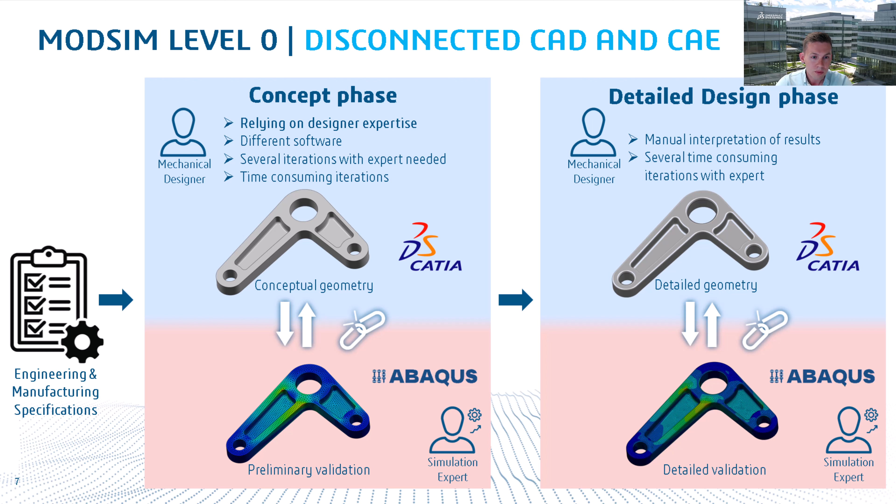The next level is if you use 3D Experience, you have integration between CAD and CAE, which means it's very easy to go from the design to the simulation. The simulation setup is created directly on the CAD geometry. So whenever the designer will do a modification on the CAD geometry, the simulation experts can take the model and just run the simulation. It will be automatically updated to consider the design change. So it is already a big gain in terms of time in the design process.

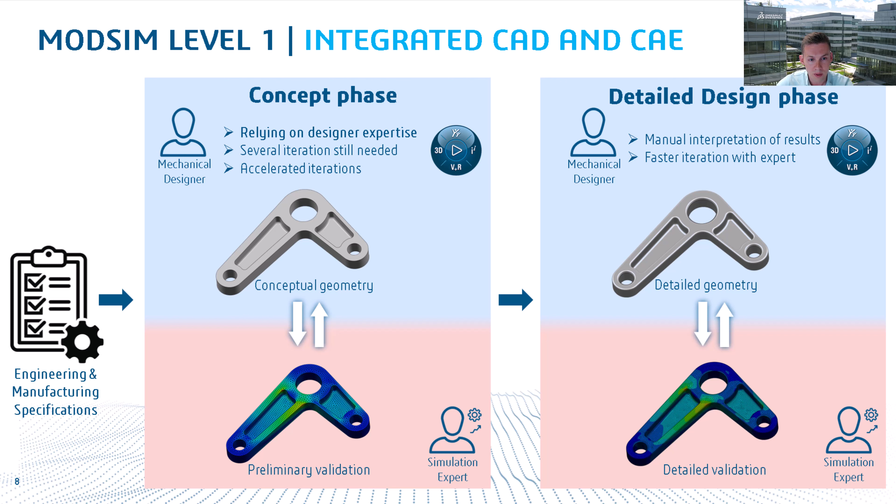However, the most challenging point when you do that is for the mechanical designers to send to the simulation team, and the simulation expert maybe will not be able to answer right now. Maybe they will work on that 1 or 2 days later. So there's a big delay between those two phases. And that's the next phase: trying to push simulation for designers. So we are never asking designers to be simulation experts. That's not their job. But the different companies are asking their designers to start getting some fundamentals on what is a simulation, how does it work, and be able to set up a simplified simulation on their geometry.

So with the help of a simulation expert, they'll be able to do the iteration by themselves. These are big game changers in reducing the time to design a product.

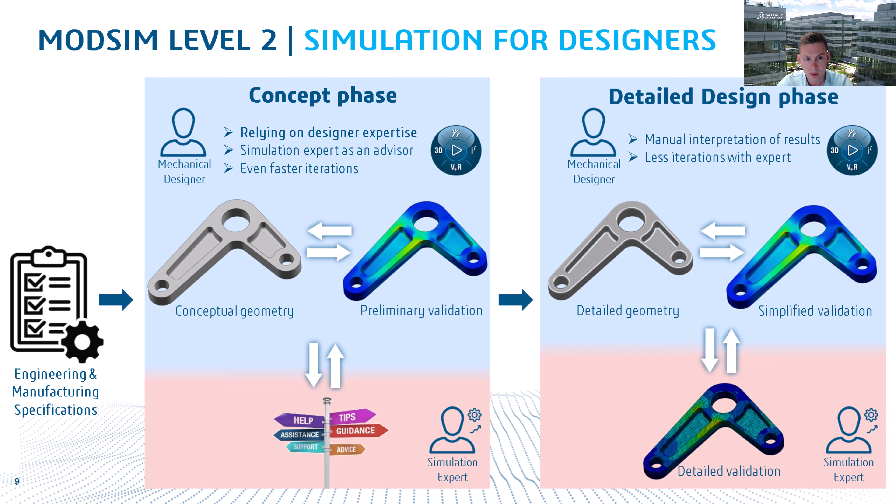But so far we still have one big challenge: interpreting the engineering specification. The designer relies a lot on his own experience, or maybe established company best practices. This interpretation of the specification is the main issue. So we ask, how can we simplify that? How can we help the designer go directly in the right direction? Because if you don't make the right assumption at the start, you'll go in the wrong direction and waste a lot of time. And that's the next step.

This is what we call generative design. We are still doing simulation for designers, but instead of having to guess the right shape, we start from the specification, meaning the designer defines what the product needs to respect. The software will propose an optimal shape based on the specification, and from this optimal shape you can automatically generate a CAD geometry and validate it.

As this process is very fast, in one iteration you can get a product that works, and you can even explore more possibilities. What if I change the manufacturing process? What if I change the material? You can generate multiple alternatives and do a trade study between all of them. So that's for the concept phase.

Even after, in the detailed design phase, rather than sending the geometry to simulation experts, looking at results and doing modifications, you have tools that help refine the geometry. Just by looking at a simulation result, you see, okay, here you have a stress concentration—let's automatically modify the thickness of these branches. So we are really providing guidance to the designer all along the process.

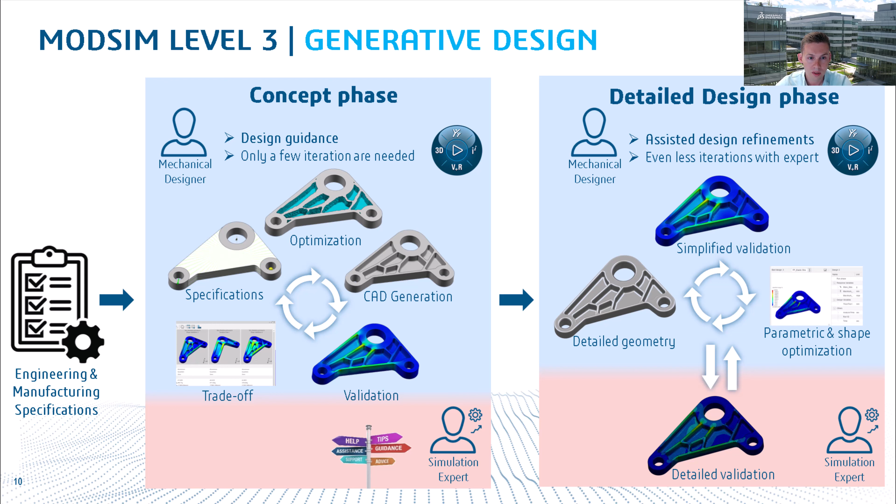Generative design, at first, maybe most of you know it can be used for additive manufacturing. It's true, but our customers are mainly using it for standard processes like plastic injection, stamping, casting, forging, and milling. The main reason is that most parts in industry are manufactured with those processes, not additive manufacturing—that's a nice technology, but a very niche market. So being able to do generative design for traditional components is really key for our customers and for us.

That's why we spend a lot of resources considering those manufacturing process constraints right in the specifications. So what we can generate at the end is really a product, as you'll see in the examples, that respects all the specifications of those processes—maybe generating ribs for plastic injection, generating beads and cutouts for stamping, respecting the parting line, the thicknesses for casting, and so on.

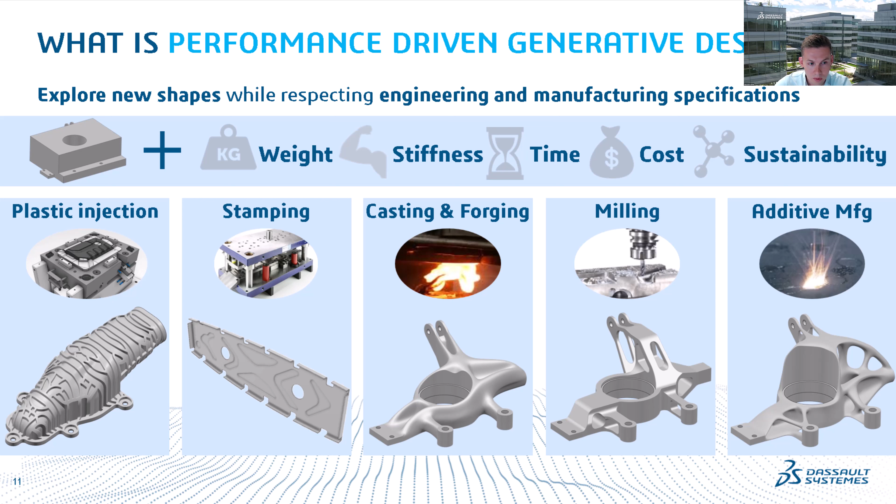If I take this example, it's an air intake duct where we have flow going through the part. Let's say I want to redesign this part because the performance so far isn't good, meaning the performance of the flow going through the part. So what we can do with generative design—since you can do it on multiple physics, structure but also flow—is first optimize the flow, the area for the fluid inside.

Using the flow generative design approach, you can find the best shape that will minimize the pressure drop. This leads to a very important increase of performance of the flow system.

After you have this new shape, at one point you want it to be injected, so you also want to reduce the amount of material to reduce cost. So you use our generative design approach to optimize the structure of the part. As it's an injected component, you want to find the best rib pattern on the shape. Using generative design, you just specify that this part will be plastic injected, and the software shows you the best rib patterns you can have on the part.

And from the geometry, we create the detailed design, and the part is ready for manufacture.

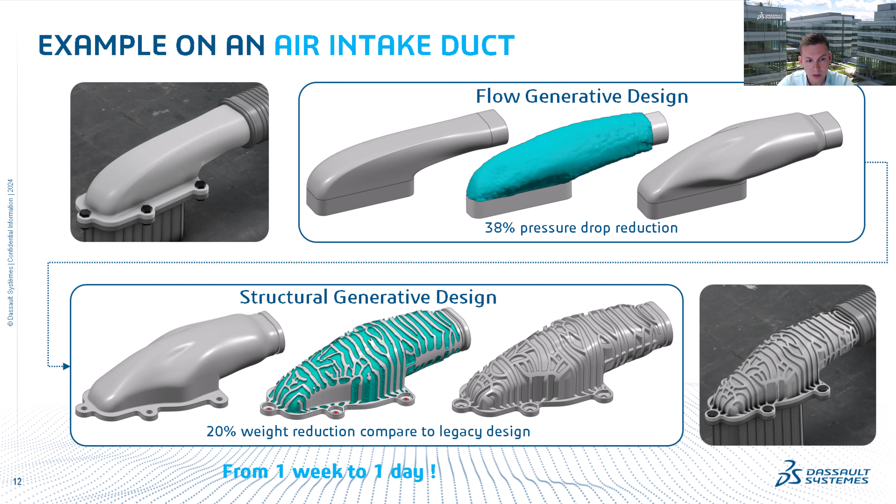So generative design is really a new technology. It came out in the industry, I'll say, three to four years ago mainly, and it's already used by more than 100 different customers that I'm working with. So it's not just something for the future, it's already there, people are using it. And as all the different industries transform their design processes, they also need people or new engineers ready for that.

They don't want engineers who are only expert in design or only expert in simulation. They want people who know a bit of everything and can exploit new ways of designing parts. So generative design is really key for all industries—that's very important. And they are looking for new engineers with those skills, because people who've been there for various years are still working in silos, and they want to break that.

Hello, so we are talking about transforming your classroom with our education experiences. First, we want to discuss a little bit about the academic challenges you could face.

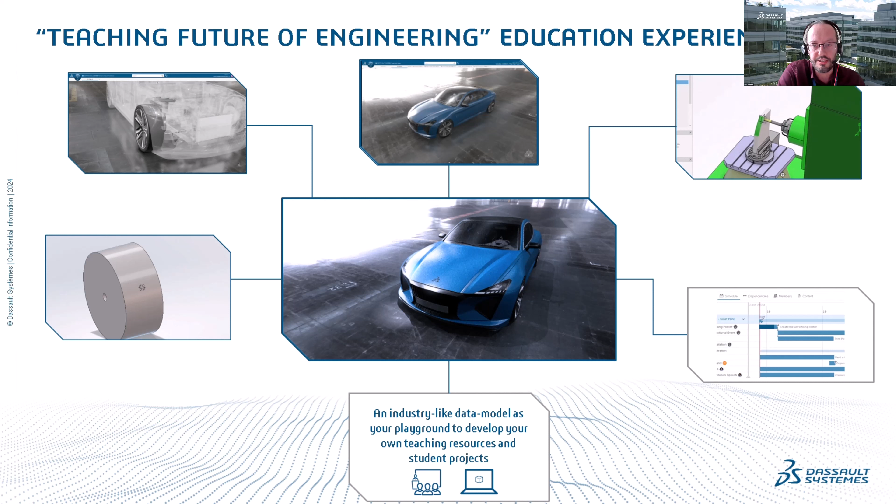Those experiences are designed to be very modular. We have multiple education experiences like Virtual Factory and BSc, but today we will show you a Teaching Future of Engineering which includes a generative design module. This education experience targets educators teaching CATIA V5 who are moving to the 3D Experience platform.

This e-learning path, or learning path, is a step-by-step end-to-end experience around our ECAR. We will see the advantages of the platform, digital continuity between key domains like design, simulation, and manufacturing within the same environment, showing a virtual twin use case.

We are within 16 hours of courses. This learning path is composed of 7 modules which can be performed independently. The first module helps the educator jump into the 3D Experience platform in less than 1 hour, assuming good knowledge of CATIA V5.

We help the teacher get back confidence in the 3D Experience platform to do CAD and other topics they already know from CATIA V5. The second module covers kinematic design and analysis in the context of the ECAR. By the end, you should be able to design the volume area of one wishbone of the ECAR, which is important for the next module.

The next module is the generative design module. With the volume coming from the kinematic design study, you can perform generative design on a wishbone, taking care of structural performance and also NC manufacturing constraints by the end of this module.

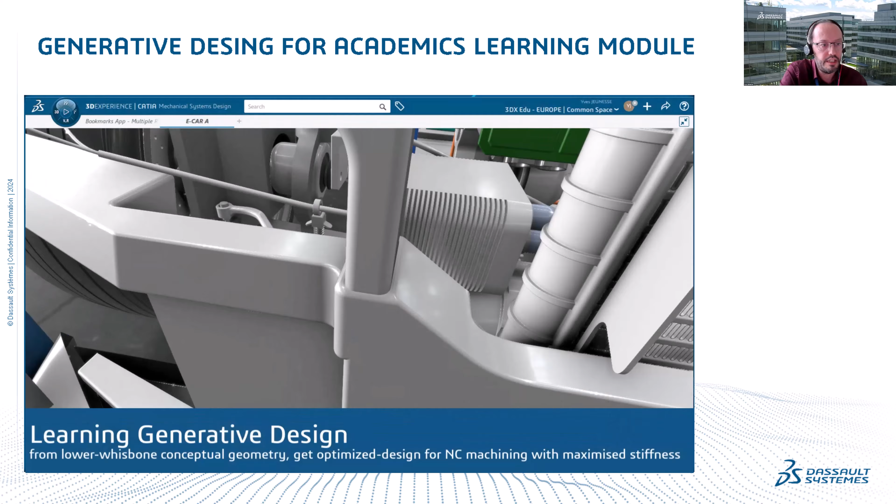We have a small video introducing what you are able to do in this learning module. We are in the context of the ECAR model, working on a wishbone. We have the volume of the wishbone and we are starting to pre-set up the environment for simulation.

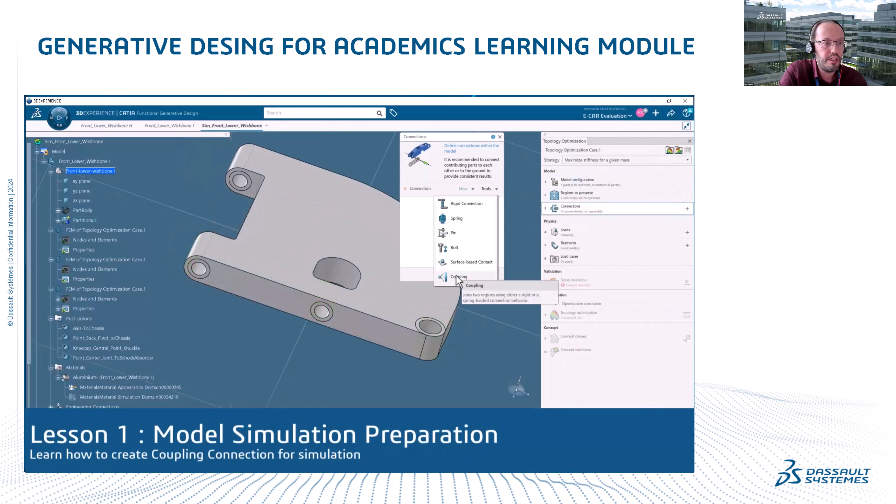We do a connection and delimit the volume as a restricted area. We do coupling connection for simulation, and after that we will apply force and loading cases.

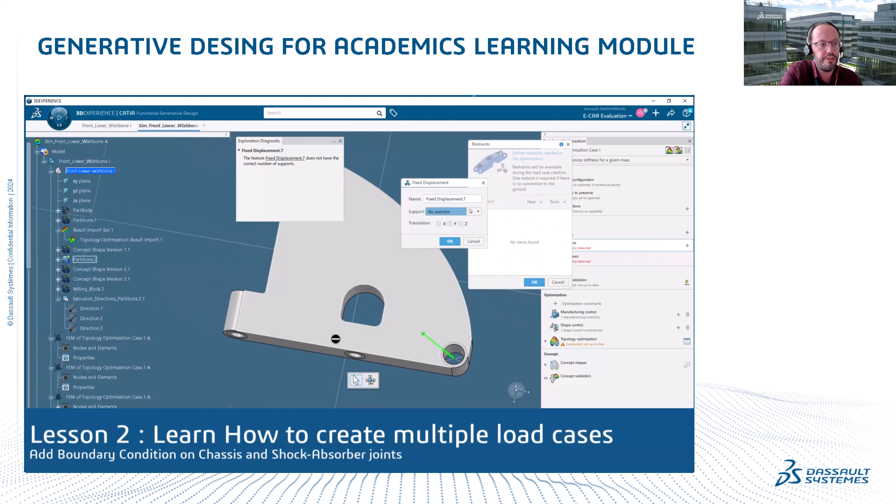We have two loading cases in this module: one for lateral shock and one for frontal shock, just for educational perspective. We place a force and are able to set boundary conditions—one for chassis connection and the second for shock absorber, and so on.

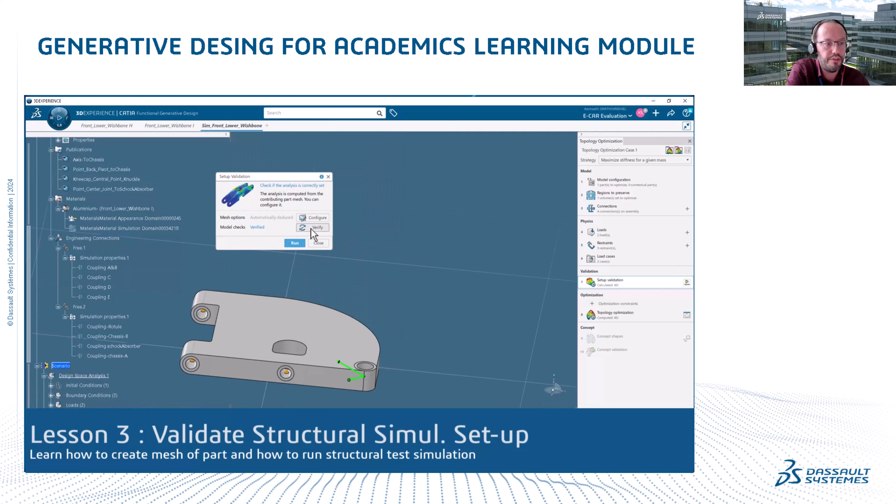After that, we switch to creating two loading cases, one for front and one for lateral shock. Then you perform the first pre-simulation just to check everything is okay in terms of the simulation context. After that, you are in a position to perform topological optimization.

In this case, we apply a symmetry constraint so the wishbone can be used on the left and right sides of the vehicle—we want a symmetrical part. We force the system to design something symmetric.

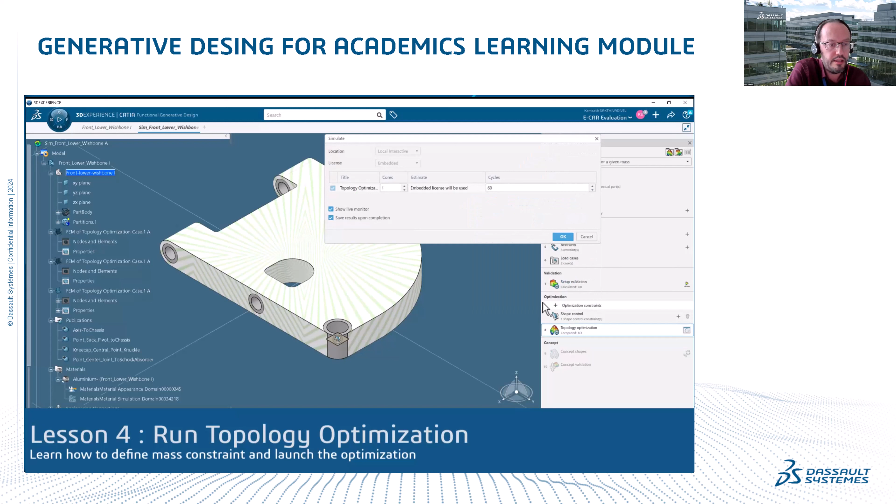We perform the first topological optimization, and after that we have the first shape already optimized with this constraint. We also place a weight constraint on the simulation, and after the computation, you will have the possibility to see the final shape.

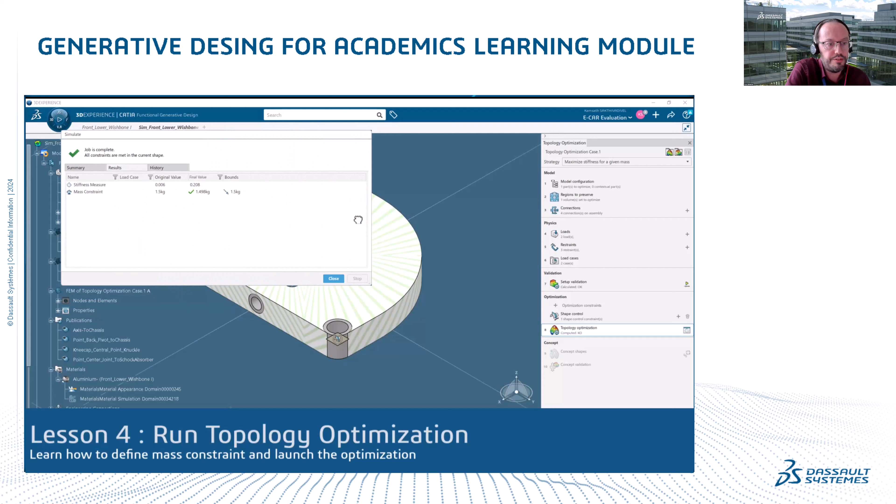So here you have a preliminary result of your shape during computation, and after all you are able to see the optimization shape. You create your first shape, and after all, when you have your first shape, you have to validate it.

With a structural analysis, that's your first step, your first iteration. And as always with generative design, the best way is to not attempt to get the final result on the first iteration. You should have multiple iterations to get your final result.

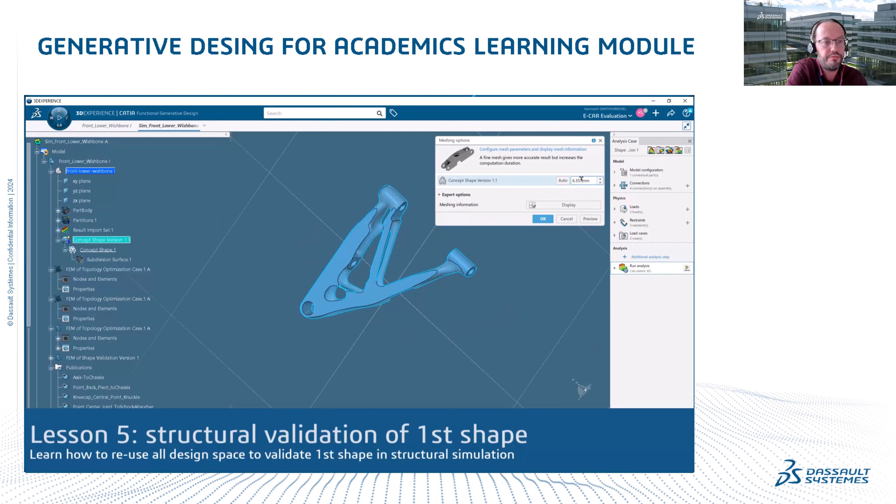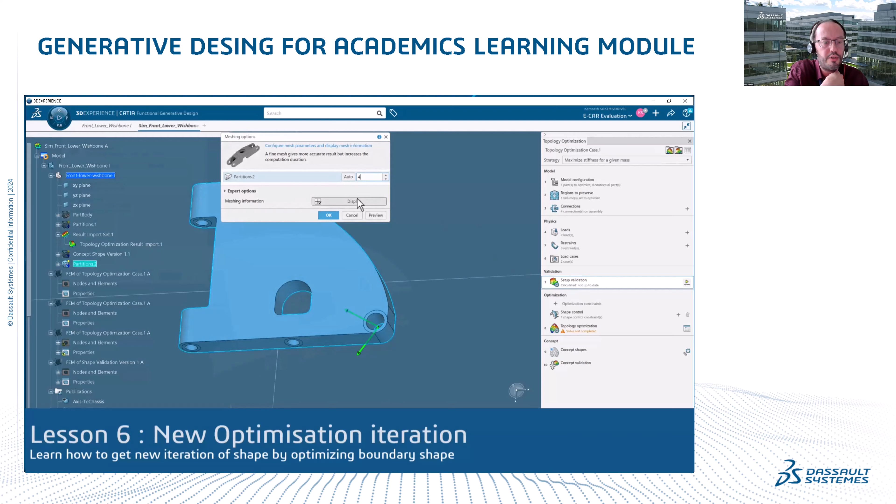So on lesson 6, you are doing a new iteration with optimize, and in this case you optimize the volumes to be able to mesh a smaller node and get more detailed results. We also have the possibility to do another iteration with a smaller target weight.

And after that, you go to the next lesson, lesson 7. On the third iteration, we are working to apply NC manufacturing constraints. So in this case, you will build a new constraint.

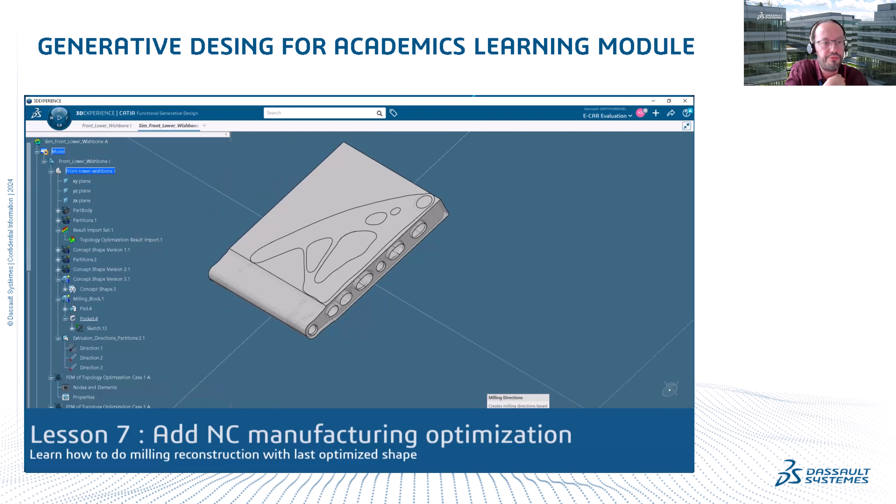After generating the topological optimization with NC manufacturing constraints, you are able to prepare and reshape with milling reconstruction to get an ideal part ready to manufacture. So at the end, you do at least a final validation on structural simulation, and you see in context the last release of your part in context of the car.

This content is not already available on EduSpace. It will be available beginning of July, but you certainly want to start now learning generative design. So how to do it?

So you have two industrial learning exercises to practice CATIA functionality with generative design. You are working on a swingarm on a motorcycle. You have the same type of steps: simulation, topology optimization, shape reconstruction, final validation, but also you are working on a part optimized for milling.

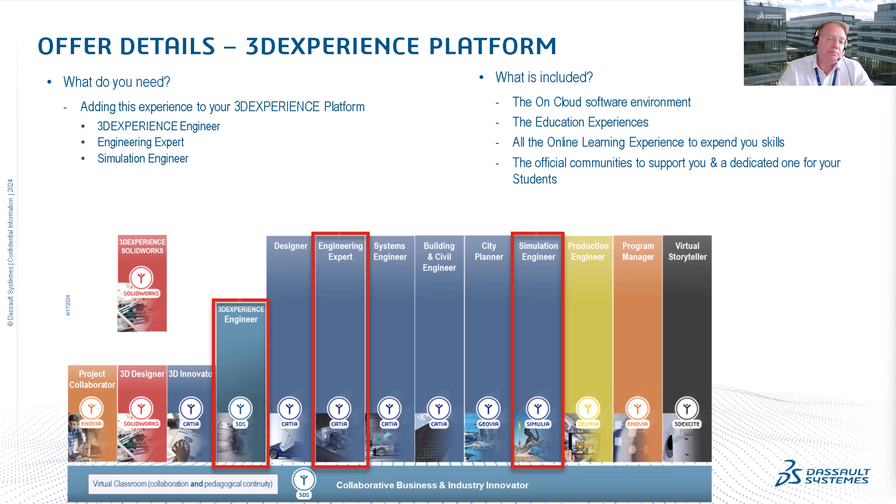Many possibilities, but the value is not only there. We also deliver value at different levels. For sure, the first level, it is on your school, your university. By using our solution, you will get a professional grade solution, and be sure that it will ensure the best employability for your student.

A lot of big companies are now using the 3D experience platform on cloud. This is the case of Renault. This is the case of many big companies like JLR and some others that are now deploying massively our 3D experience solution on cloud, and providing learning about what the big companies are now using.

For sure, for your student, there is absolutely more value. That is on the cloud. For sure, you will get a fully secure and up-to-date, as I said, solution at any time. This is really important. You understood now. 3 weeks ago, we did a webinar about the production and manufacturing. Now it is on the design and simulation. The platform is a multidisciplinary and collaborative solution for all, and this is really important.

And at the end, you can provide to your student a professional certification in order to be recognized for their skills when they will be hired by a company. For you, mainly because you answered a survey at the beginning of this webinar. For you teachers, as you understood, we deliver all the assets in order to perform your classroom, to reuse it if you want to adapt what we provide to you.